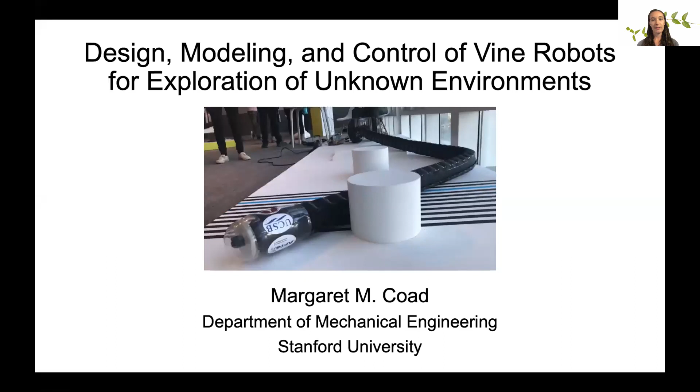Thank you so much, Allison, for that amazing introduction. It's so great to see all of you here, and I'll say more about that in the acknowledgements at the end. But I'm really excited to tell you today about my PhD research on a new type of robot that moves through its environment by growing like a plant. Here's a quick preview of the types of robots I'm going to be talking about today. The title of my thesis is Design, Modeling, and Control of Vine Robots for Exploration of Unknown Environments.

In the talk today, I'm going to start by giving an introduction about what vine robots are and what they're good at. Then I'll talk about how I brought a vine robot system out into the field to explore an archaeological site. Then I'll talk about three areas of research that I discovered based on the field exploration and worked on after I got back. The first was retraction of these robots, that is reversing their growth. The second was applying forces to the environment. And the third was using the entire body of the robot to sense the environment and the robot's own shape. Then I'll conclude with a summary of the contributions of this work.

I'll start with the introduction, and I'll mention that some of this information and a lot more about the state of the art of vine robots is published in a paper in the Frontiers in Robotics and AI journal from last year called Design, Modeling, Control, and Application of Everting Vine Robots.

There are many spaces that are too small or dangerous for humans to enter where we would like to see and manipulate the environment. Inspecting a water pipeline, searching a collapsed building, conducting minimally invasive surgery, or doing underwater archaeology are just some examples of these types of spaces where a robot could really help us get in and do tasks. However, there are a lot of challenges with existing robot design that make them unsuitable for these types of tasks. As one example, they need to be able to fit through small spaces while also being able to navigate over and around obstacles. That combination is challenging.

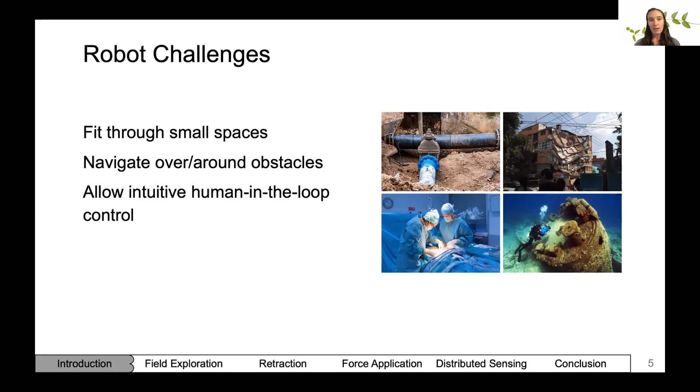Now, many of today's robots, such as the ones found on a factory floor, are rigid and very strong and able to do repeatable movements, but they're not able to do these types of tasks very well. So if you look to nature, you'll see that a lot of systems, like the bodies of squirrels, bees, octopuses, and vines, are not made of entirely rigid components. In fact, they might be made of a combination of rigid and soft components, or they might even be entirely soft.

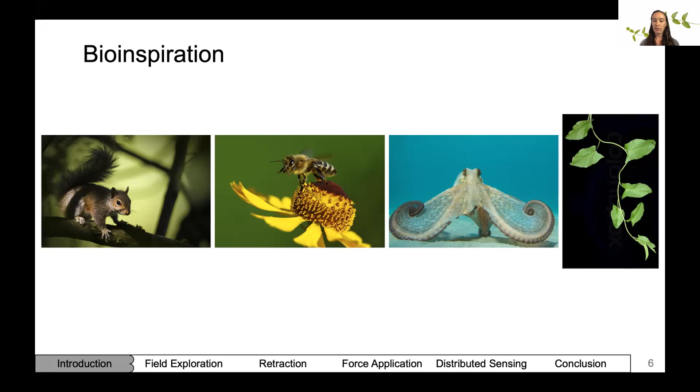For the rest of this presentation, I'm going to be telling you about how this new robot design paradigm of plant-like tip growth transforms robot capabilities for exploration of unknown environments.

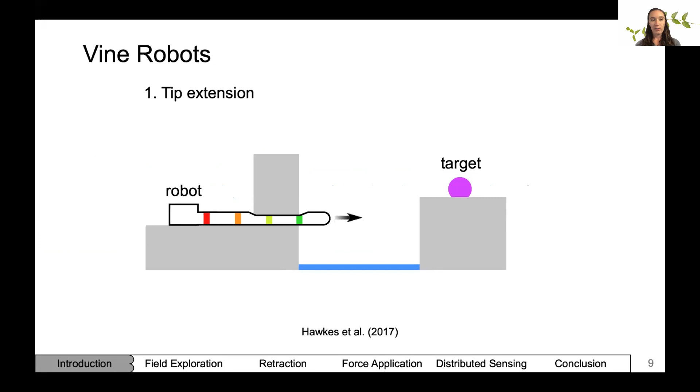The idea behind vine robots is that we want to have a robot that grows like a vine from a fixed base to a target. Vine robots have three main attributes. The first is tip extension. The second is directional control, so we can steer them as they're growing. And the third is significant length change.

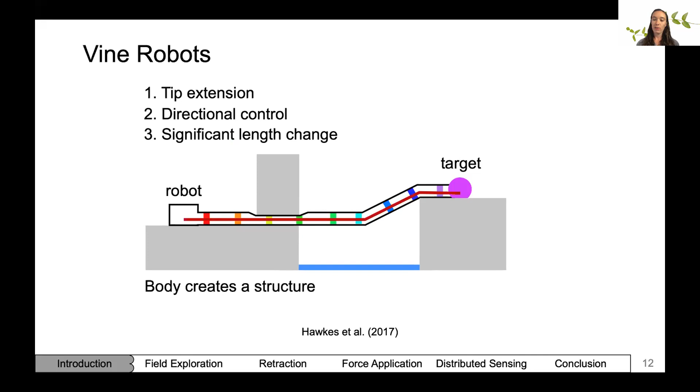Now, movement in this way has two main benefits over other types of movement. The first is that these robots can navigate confined spaces with ease because they don't need to slide relative to their environment to propel their tip forward. Second, their body creates a structure from base to tip, which can be used to transmit payloads or to transmit forces from the tip back to their base.

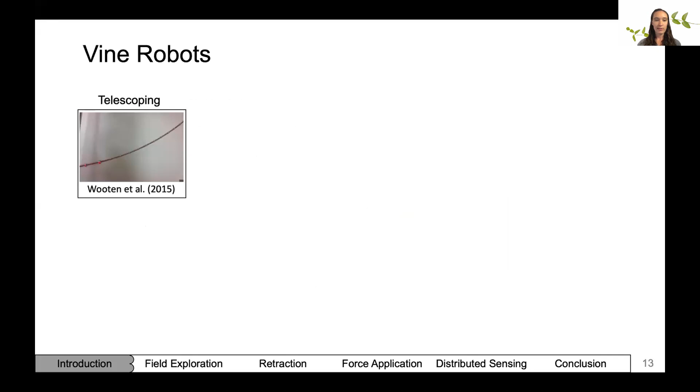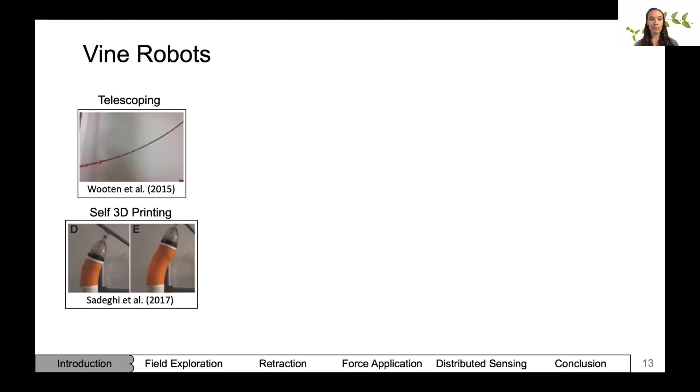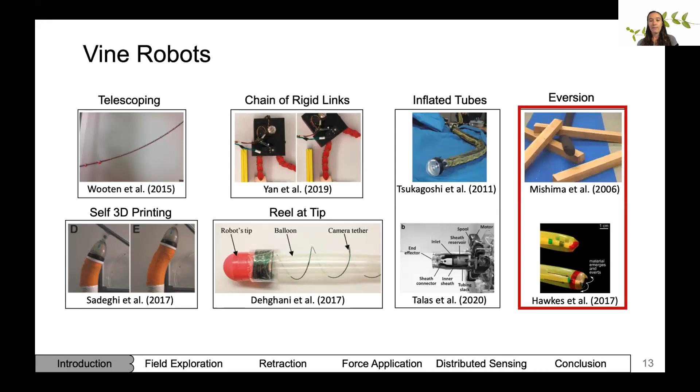Everting vine robots are made of a tube of flexible, non-stretchable material. Imagine a plastic bag that's folded inside of itself. When internal air pressure is applied, it grows out from the tip.

This is similar to trying to put on a sweater, but the sleeve is stuck inside. As you put your arm through the sweater, you push out the sleeve and it grows along with your arm, growing as your arm pushes it through.

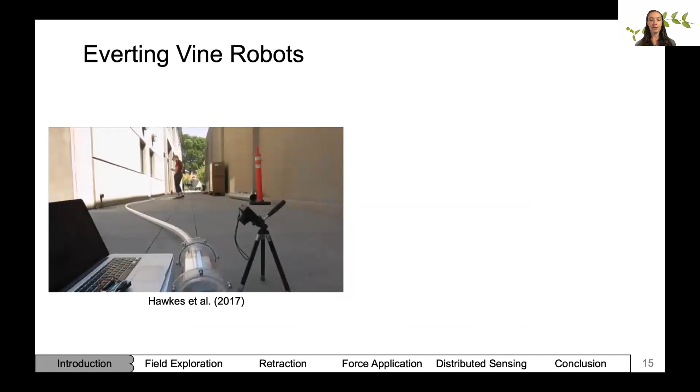These types of robots can grow to enormously long lengths by storing their material on a spool in the base. Here's a video showing growth to 72 meters long. The only reason it stopped growing was because it ran out of material.

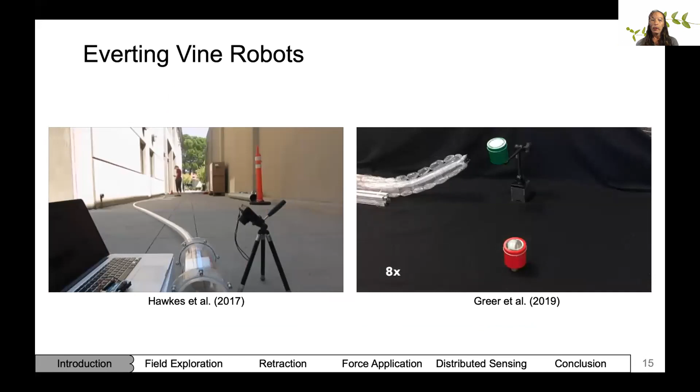They can also be steered by shortening or lengthening one side or the other of the robot body.

In addition, these robots have several benefits for exploration of confined spaces. First, they can navigate by using contact with the environment to allow them to steer as they run into obstacles. In addition, they can grow through apertures smaller than their body diameter, and they can use their continuum nature to support their own body weight and rise up over obstacles.

Based on these proof of concept designs developed in the lab, we wanted to take vine robots out into the field and see what they could do in the real world. This work is published in IEEE Robotics and Automation Magazine from last year as 'Vine Robots: Design, Teleoperation, and Deployment for Navigation and Exploration'.

Our research question was: how should we design and control a vine robot for exploration in the field? We had this amazing opportunity to take our vine robot out into the field to explore archaeological tunnels in an underground temple in Peru.

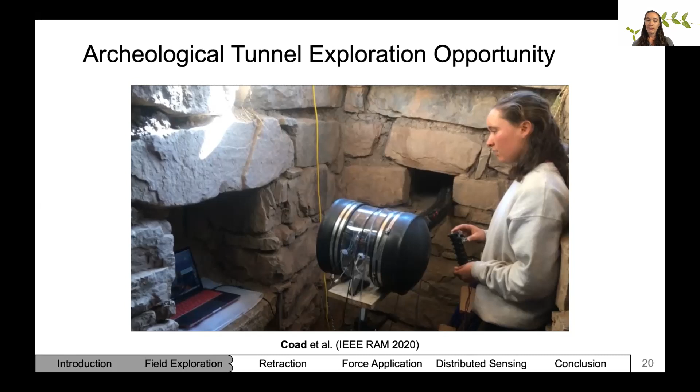There were small spaces too small for a person to enter, and the archaeologists wanted to be able to take video and see what was inside there.

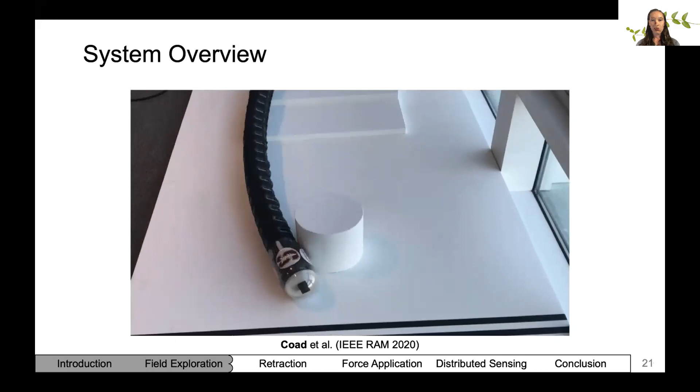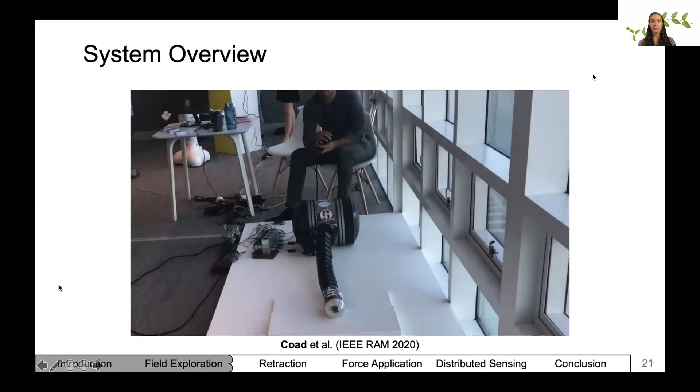Here's an overview of the system that we developed. It's a steerable vine robot with a camera at the tip that's able to grow to 10 meters long, and it's also able to be operated by a human operator using a flexible joystick.

This is an overview of the system. It has three main portions. First, the growing portion, which contains the camera mount and the soft robot body. Then the base station, which contains all of the pneumatic and electrical components required to control the soft robot body. And then the human interface, which allows the human operator to provide control commands to and receive visual information from the robot.

One of the things we needed to be able to do to use this robot in the field was to steer it at lengths long enough for navigation. So we needed to develop a new actuator that could work at long lengths.

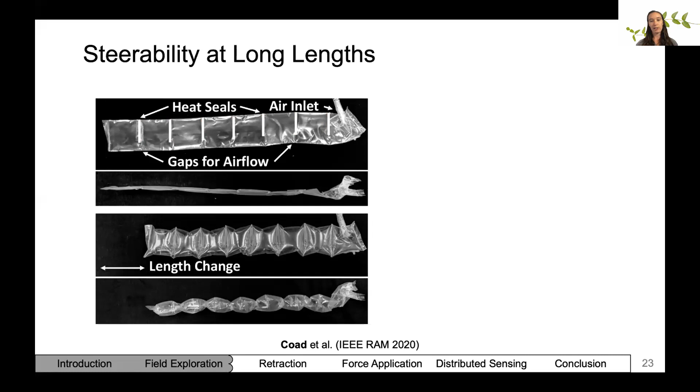This is the series pouch motor actuator, made by heat sealing a tube at regular intervals while leaving gaps for airflow, such that when the tube is inflated, each little pouch balloons up and shortens in length, causing the entire actuator to change length.

If you place 3 of these series pouch motors circumferentially around the robot body and along its entire length, you can have control over the robot tip position in 2 degrees of freedom, with the 3rd degree of freedom of tip position provided by growth.

Here's a video showing what that looks like. You can see that I'm commanding the robot to curve, and it's able to steer in any direction.

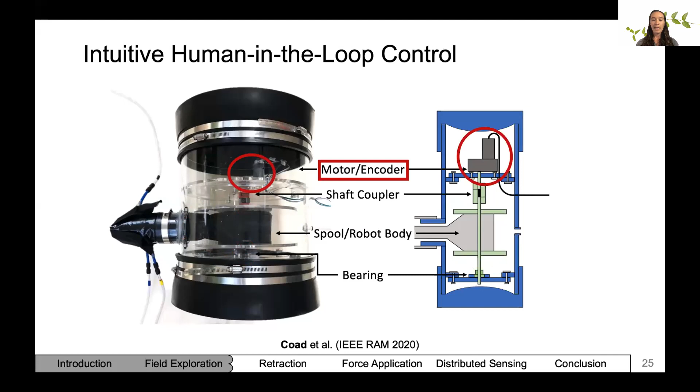Another thing we needed to do was enable intuitive human-in-the-loop control of both growth and steering. For growth, we developed a spool where the robot body is stored before it grows. On one end of the spool there's a bearing, and on the other end there's a shaft coupler that connects the spool to a motor and an encoder, which unreel to let out the robot body material as it gets pulled by the internal pressure.

Here's a video showing how that works. By using this spool and the motor in combination with pressure, we can control pressure and robot length independently.

In addition, we wanted to develop intuitive control over the steering. So we took the information measured by the joystick, which measures its own orientation using an inertial measurement unit at the tip. That inertial measurement unit provides a quaternion, which we convert to a curvature and bending plane angle of the joystick using constant curvature assumptions.

Then we calculate the joystick tip coordinates in its own reference frame, which we then map to the robot's own tip coordinates. And then we use a geometric model of the placement of the actuators, the series pouch motors, around the robot body to calculate what pressures we should send to each of the actuators to produce the desired robot curvature.

Another thing we needed to do was to enable operator situational awareness so that the human operator would know where the robot was without having direct line of sight of the robot tip. So we placed a camera at the robot tip, which gets pushed along by a rigid cap as the robot grows. This is similar to how a surfer gets pushed along by a wave, even though the wave is moving underneath the surfer.

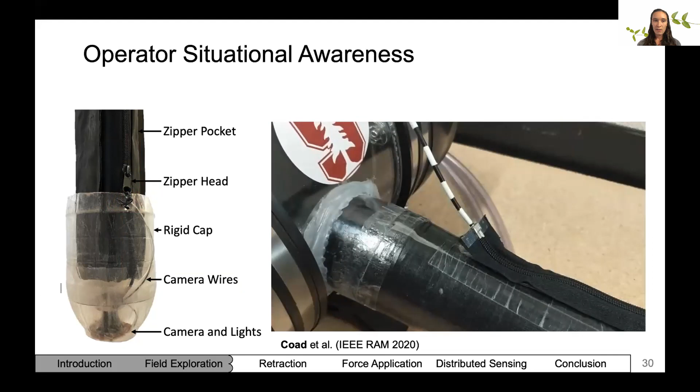So now that we had this system, we were able to take it outside and see how it did in the field. We explored 3 locations at this archaeological site that were chosen based on their expected relatively short length and difficulty to view through other means.

The first location was a tunnel that curved slightly to the right and had a rock blockage that the robot was successfully able to navigate and take video throughout much of the tunnel.

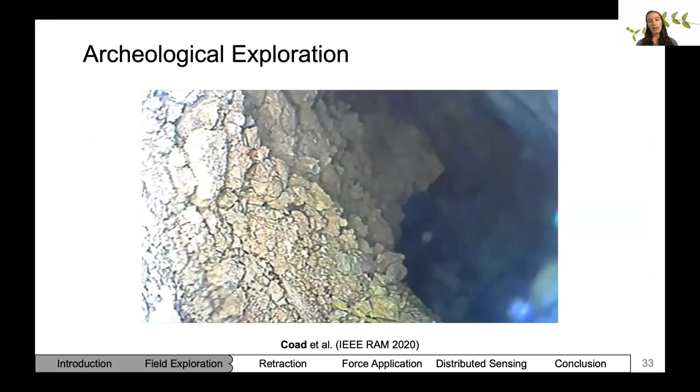The next tunnel had a 90-degree right turn, which would have been difficult to navigate with just a camera on a stick. The vine robot successfully navigated the turn and took video throughout the tunnel.

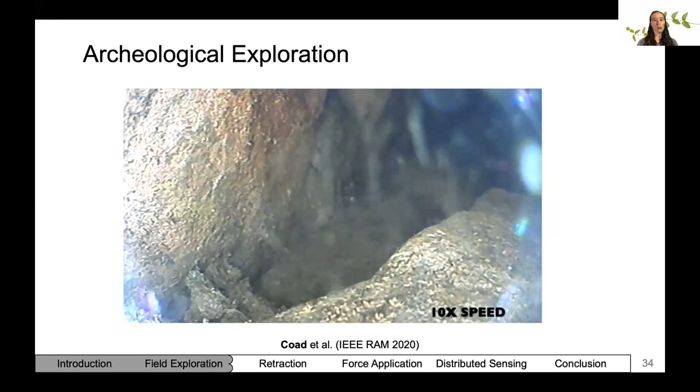Finally, the vine robot navigated a vertical shaft, which would have been really difficult for a remote controlled car, for example, and it successfully made it to the end of the tunnel.

In summary, our design and control method was successful for exploration in the field, and this was really exciting because it showed that we could use these vine robots for exploration tasks in the real world. The key takeaway here was that intuitive human-in-the-loop control was made easier by exploiting the desirable behaviors of the robot body. This field exploration was also really great for identifying areas for important continued work that would make these robots even more useful in the field.

So one area was retraction without buckling - getting these robots to be able to ungrow without losing control over their motion and force.

Another one was allowing excavation or environment sampling. So if you wanted to not just look at the environment, but apply forces to move obstacles in the environment or take samples of it, that was something the archaeologists were really interested in.

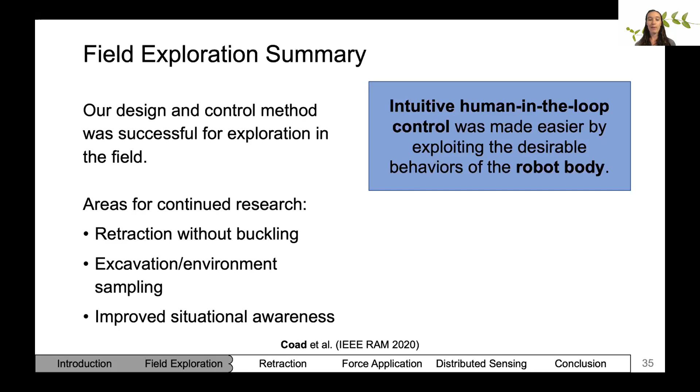And third, we wanted to enable improved situational awareness for the human operator, because just viewing the camera tip image was actually not super intuitive for understanding where the robot had gone. Developing some other way to create a map of the robot shape and where it had traveled would be really helpful.

So I'm first going to talk about solving that first challenge, retraction. This work was published in the IEEE Robotics and Automation Letters journal last year, titled Retraction of Soft Growing Robots Without Buckling. Our research question here was, why does undesired buckling occur during vine robot retraction, and how can we prevent it?

What I mean by undesired buckling is that when you pull on the inner material from the robot base, instead of inverting back on itself, the robot body tends to buckle into this uncontrollable shape. This can be disastrous if you're trying to have precise control over the motion of the robot and its force applied to the environment.

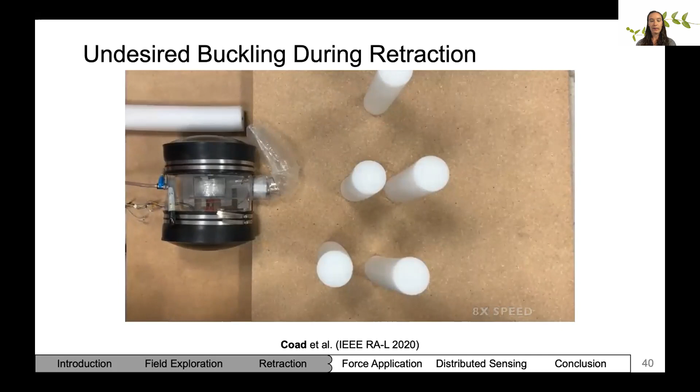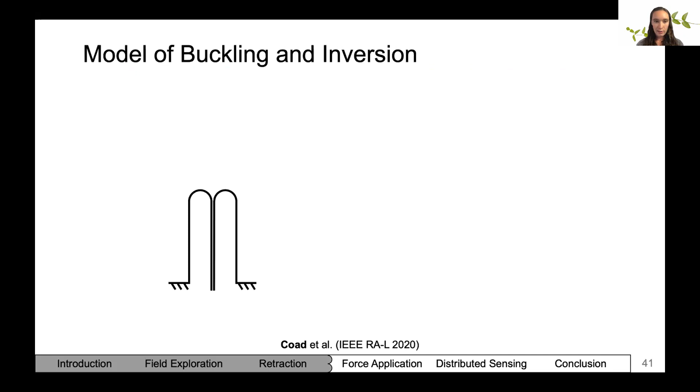So we started by developing a model to understand what's going on here and why buckling sometimes occurs and why inversion sometimes occurs. First, a little bit of terminology. Here's a side view of the vine robot. The tip is the distal end, and we call the wall the part of the robot body that doesn't move away from or toward the base. We call the inner part the tail, and that does move away from or toward the base as the robot grows. In order to get the robot body to invert, you need to apply a certain amount of tail tension, TT, on the tail.

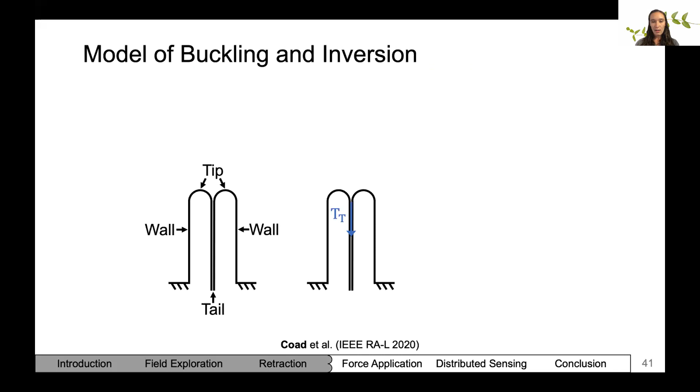Our model assumes that either inversion or buckling will occur depending on which one requires the lower tail tension.

Something else we noticed was that straight robots tend to buckle in the middle, similar to axial buckling of inflated beams, whereas curved robots tend to buckle at their base, similar to transverse buckling of inflated beams. Since buckling occurs differently in straight and curved robots, we model them differently, and there are existing equations for modeling these types of robots that we were able to make use of.

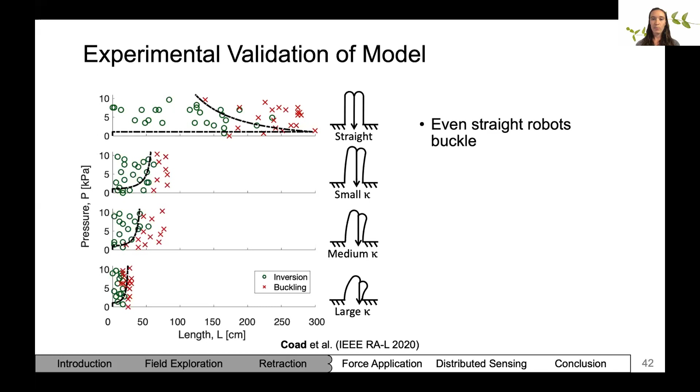A few takeaways from this model: even straight robots buckle, so you can't just make sure that the robot is straight and expect it to never buckle. Also, even high pressure robots buckle, so ramping up the internal pressure is not a solution to this buckling problem.

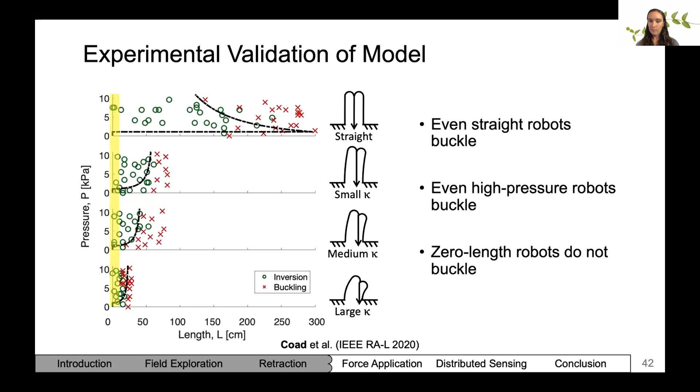Finally, the key insight here was that zero length robots do not buckle. So if we could somehow make sure that the robot length is always very short, then we would be able to prevent this buckling issue.

So this is the inspiration for our retraction device that we developed. The idea was that we wanted to make the effective robot length zero for the purpose of retraction.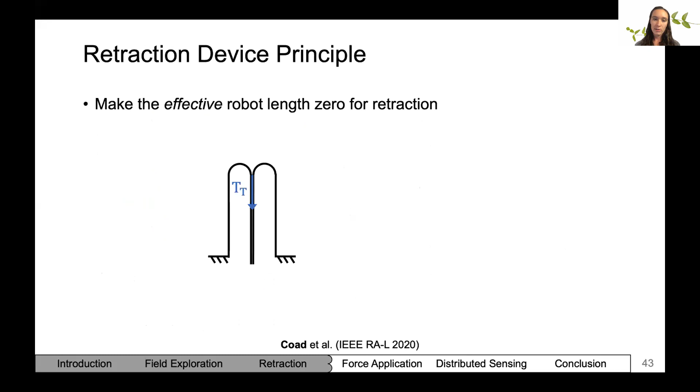What we were doing before was applying this tail tension to cause inversion, but we were applying it using a device, a motor at the base, which applies a device force FD and an equal and opposite grounding force FG on its environment. However, this means that the entire robot length is susceptible to buckling due to this force.

Our insight here was that we wanted to apply the force on the tail while being grounded to the robot tip. So we moved our device to the robot tip, where it applies its device force FD and its equal and opposite grounding force FG, but this time at the robot tip. This makes the effective length for the purpose of retraction zero.

Here's how we implemented this device. We had a pair of motors surrounded by a pair of hollow rollers that grip the tail. We also had a pair of routing apertures, one towards the tip and one towards the base, designed to be low friction, and also a tip grounding ring, also designed to be low friction.

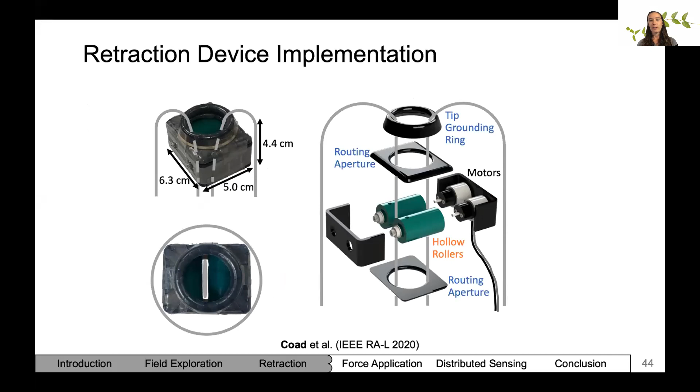Now that we have this new capability to retract without buckling, we wanted to show what we could do with it. One of the things you can do now, as shown in the bottom video, is actually explore a forking path. If you go down one fork, then you can retract, and then you can steer as you go down another fork.

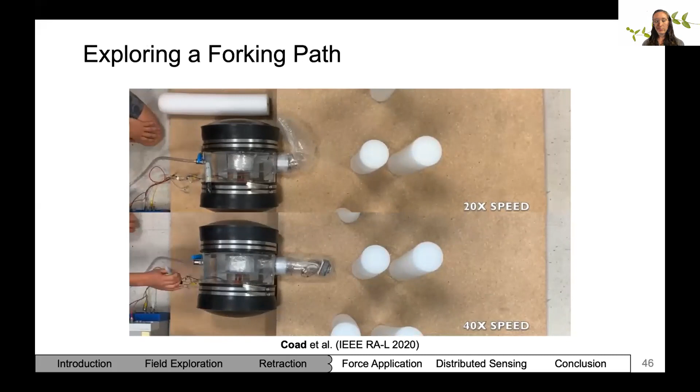Another thing you can do is navigate a delicate environment without applying undesired forces. In the top video, there's no retraction device, and the robot is actually successfully able to retract through this without buckling, but it does end up applying a high force to the environment. In the bottom video, you see that with the retraction device, the force applied to the environment is much reduced.

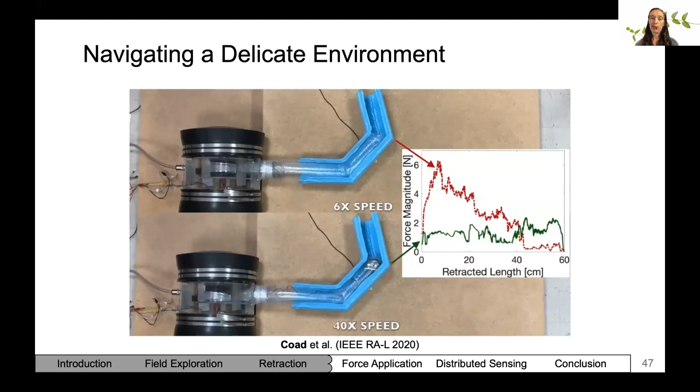Another thing we're able to do is collect samples of the environment by growing over the environment with tape stuck to the bottom of the robot body, then retracting back in. The tape sticks to the soil and environment, and the soil gets packaged inside the robot tail, allowing it to return to the base in reverse order of where it was found, leaving the environment undisturbed.

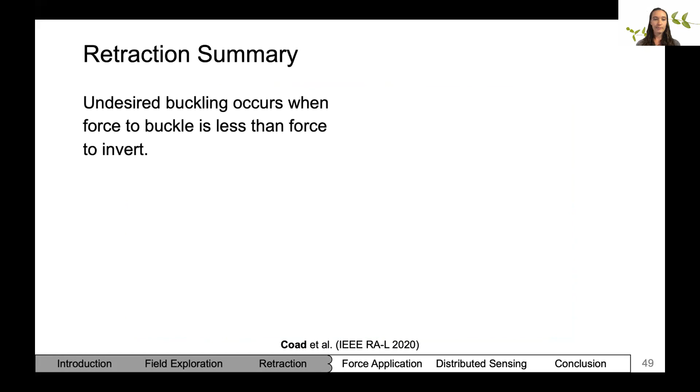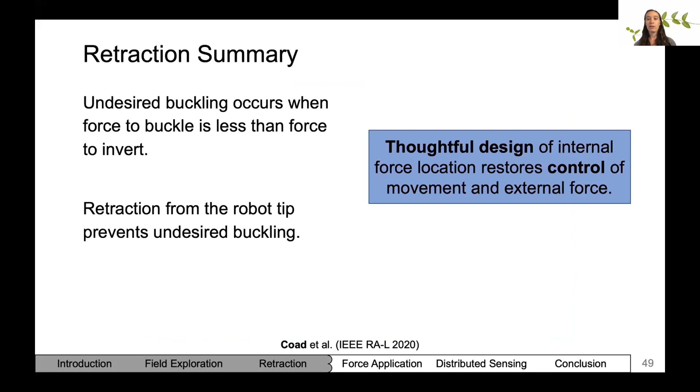In summary of this section, we learned that undesired buckling occurs when the force to buckle is less than the force to invert the robot, and that retraction from the robot tip prevents undesired buckling. A key insight was that with thoughtful design of the internal force location, we were able to restore control over the robot's movement and its external force application.

Now that we have this device at the tip, we wanted to take advantage of it to apply forces to the environment. This is work published in IEEE Robotics and Automation, at the IEEE RSJ International Conference on Intelligent Robots and Systems last year, under the title 'A Tip Mount for Transporting Sensors and Tools Using Soft Growing Robots.' Our research question was: how can we use a vine robot's high strength in tension to apply forces to the environment?

This is an interesting idea because something true of all engineering materials I know of is that their buckling strength in compression decreases with length, but their strength in tension remains constant with length. This is particularly important for vine robots because they can grow so long, and we want them to be able to apply high forces even when they're very long.

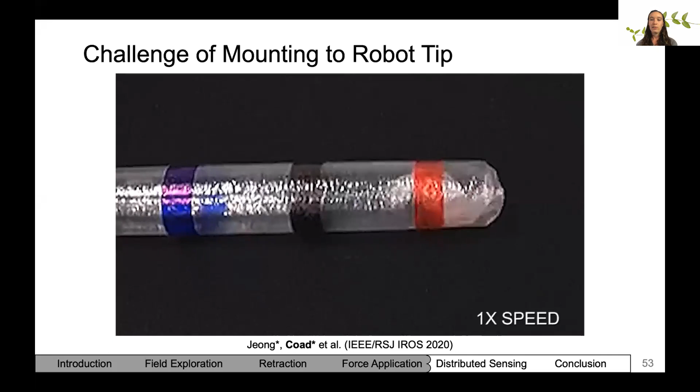So we wanted to mount something to the robot tip that allows us to apply forces there. But there are several challenges of mounting to the robot tip. One is that the material at the tip is constantly changing, so you can't just stick something there and expect it to stay there.

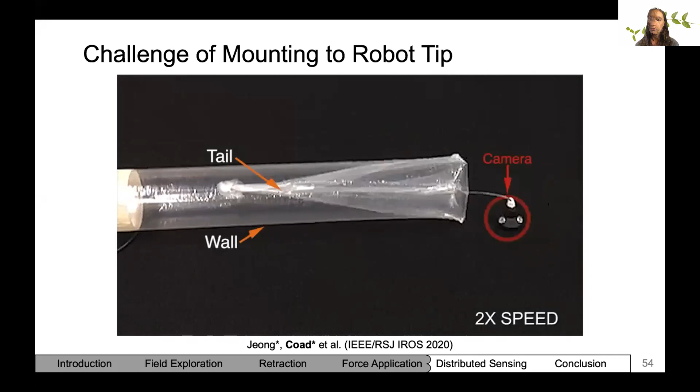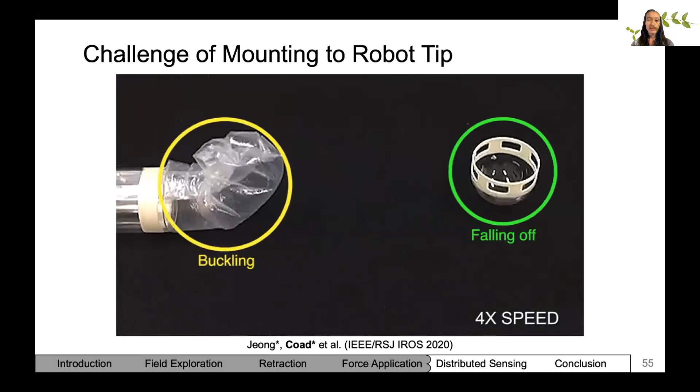Another challenge is that the tail of the robot moves at twice the speed of the robot tip. So if you were to place a camera with a string that goes inside the tail, the camera would get ejected as the robot grows and engulfed as it retracts. A third challenge is that with the rigid cap design I presented earlier, while it stays on the robot tip during growth, it actually falls off during retraction.

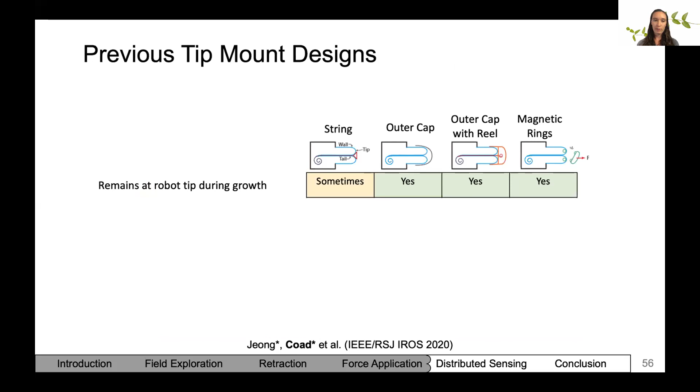There have been several previous tip mount designs developed for vine robots, and each has its own benefits and drawbacks. Some can remain at the robot tip during growth, some remain during retraction, some can transmit pulling forces to the environment, and some can function at arbitrary robot lengths. But none so far allow retraction without buckling. We wanted to create a tip mount design that has all five of these capabilities.

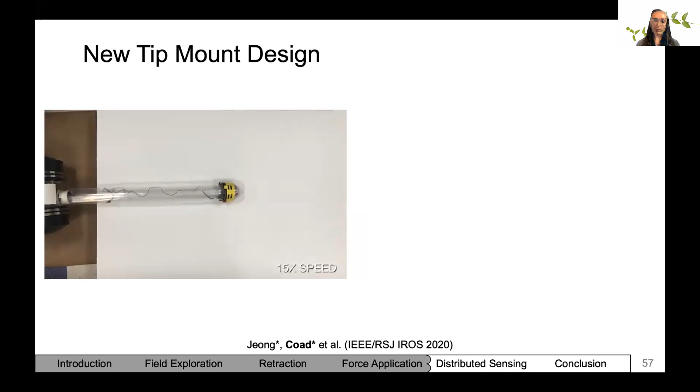Here's the design we developed. You can see that it does successfully remain at the robot tip during both growth and retraction without buckling, that it can remain at the tip during steering, and that it doesn't interfere with the operation of the series pouch motors.

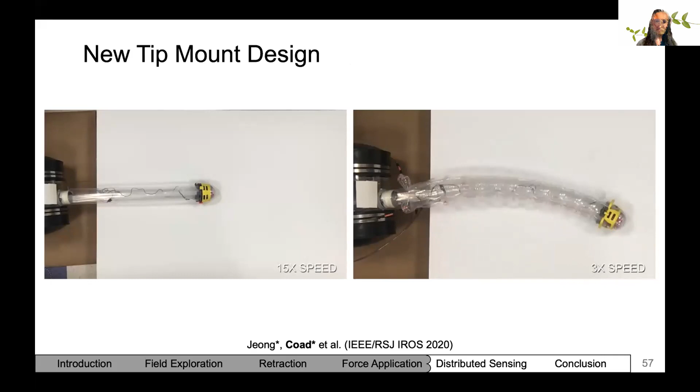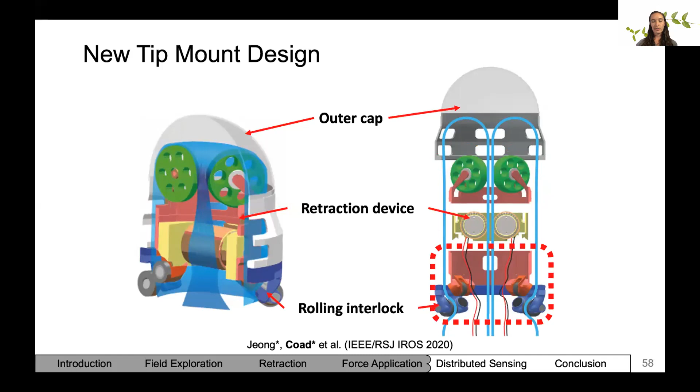Here's our design. It has three main components: first, the outer cap, then the retraction device, and then the rolling interlock, which interlocks the outer cap over the retraction device. The rolling interlock has bearings that allow the robot body material to pass through in a low friction manner, while making sure the outer cap will not fall off during retraction or during environment force application.

We were successfully able to show that we could pull on the environment using this tip mount design, and we wanted to understand what factors affected the weight limit we could pull with this device. The factor that actually ended up limiting the force we could lift was the rollers in the retraction device slipping on the tail.

Those limited the force capability to 2.5 kilograms. If we could improve that interface between the rollers and the tail, we could improve the weight limit. The next factor we'd come up against is the motor torque limit, which would limit the strength to 3.3 kilograms. If we could improve that through different actuation or stronger motors, the next limit would be the tip mount device itself falling apart, which happened at 7 kilograms.

If we could improve that by reinforcing the design, what's really exciting is that the material of the robot body itself could support up to 25 kilograms for this particular thickness. By making improvements to our design, we could actually apply an order of magnitude more force than we're currently able to, which ends up being quite a lot of force for a soft robot to apply.

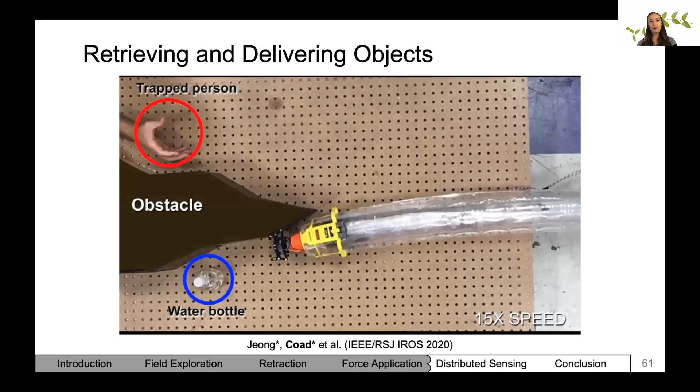And now that we have this tip mount design, we demonstrated that we can, for the first time, retrieve and deliver objects. Here the robot goes to the water bottle, retrieves it, and then delivers it to the trapped victim.

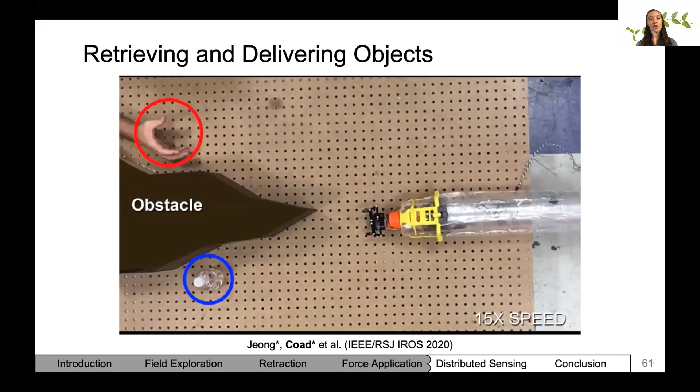In summary of this section, with thoughtful end effector design, we were able to transmit high tensile forces from the environment to the robot body while still allowing growth and retraction. A key insight here was that by harnessing different properties of the robot body in different directions, we were able to achieve both adaptability and strength. So the robot body maintained its flexibility and bending, but was strong in tension.

This gets at one of the grand challenges in robot design, which is combining adaptability and strength, because soft robots tend to be adaptable and rigid robots tend to be strong, but achieving the combination is challenging.

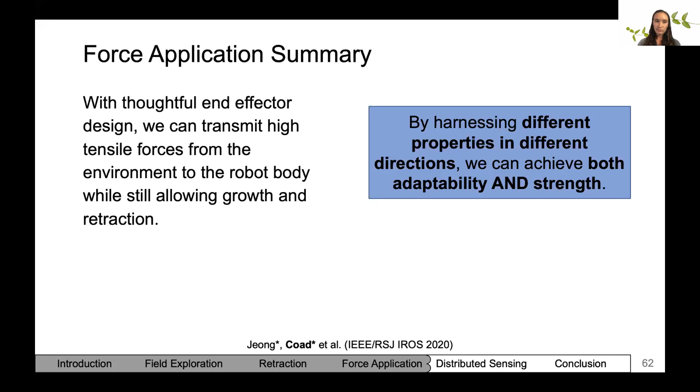So far we had looked at placing sensors at the robot tip, like cameras, but next we wanted to look at how we could place sensors along the entire robot body and use that to map the robot shape. This work is presented at the IEEE International Conference on Soft Robotics this year, under the title Distributed Sensor Networks Deployed Using Soft Growing Robots. Our research question here was, how can we sense the environment and the robot's own shape?

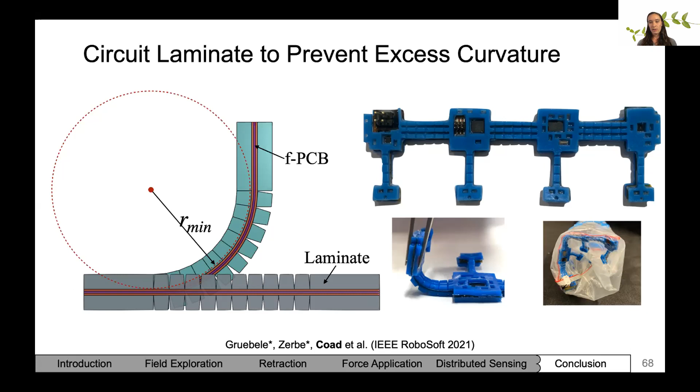We developed this blue laminate made out of urethane, which has a jamming teeth pattern, such that when the flexible circuit bends to too tight of a radius of curvature, the teeth jam, preventing it from bending any farther, but it also still allows the whole assembly to be flexible up until that point. You can see here that the laminate successfully protects the circuit while still allowing growth of the robot.

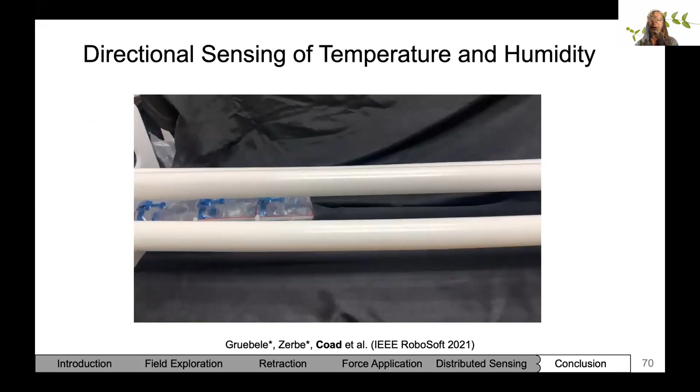Here's a demonstration of directional sensing of temperature and humidity using this sensor network. We're growing the robot in between a set of 2 pipes that are leaking steam, and then we're able to locate the leak.

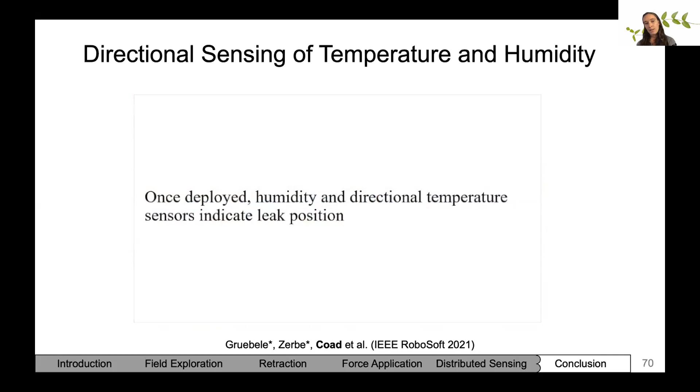In addition, we did shape sensing with vine robots using the inertial measurement unit orientations measured at each band, combined with our knowledge of their 3-inch spacing along the robot.

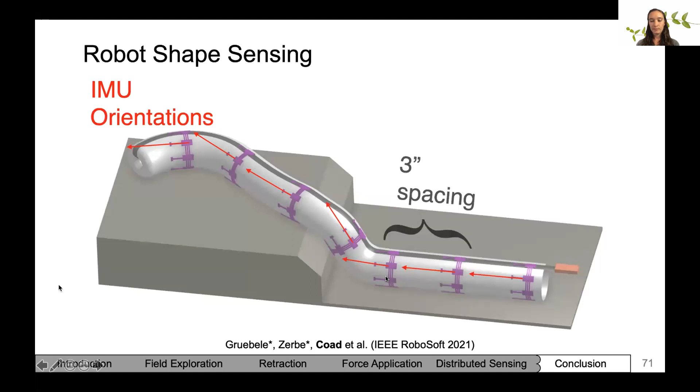To reconstruct the robot shape, we only know the orientation of the robot at these discrete points where the sensor bands are. Here's sensor band 1, and here's sensor band 2, and we don't actually know what's going on with the robot shape in between those 2 sensor bands.

If you look at the picture on the right, we notice that most of the time when the robot is inflated, it tends to bend at a discrete location, forming a bend that has a straight segment on both sides and then an approximately circular arc. So we assume that's how the robot bends in between these sensor locations.

However, we still don't know precisely where between the 2 sensors the bend is located. That introduces uncertainty into our shape prediction, which we quantified later.

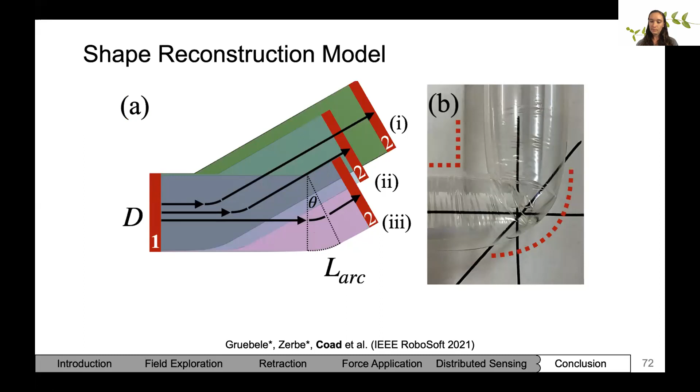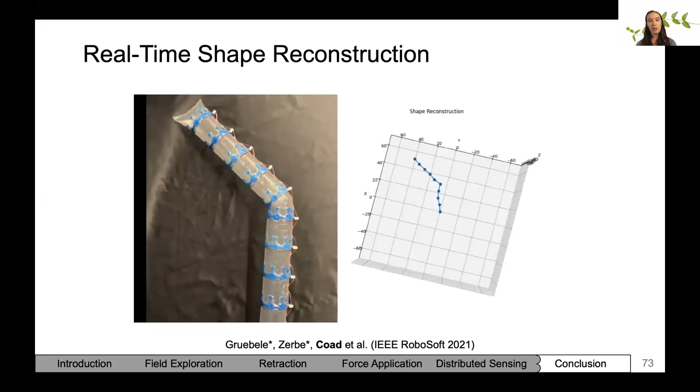We showed that this also works in 3D. We were able to grow the robot body through a pipe and map out the shape.

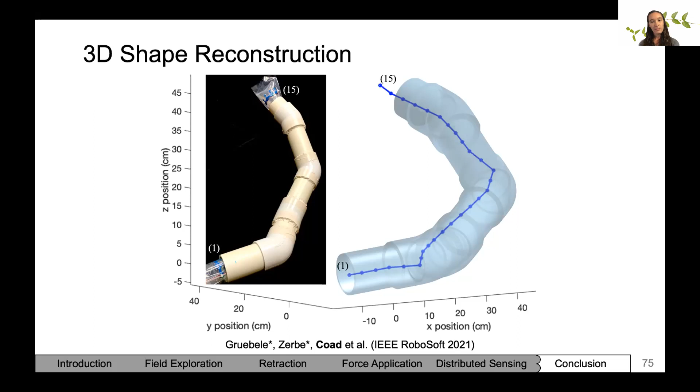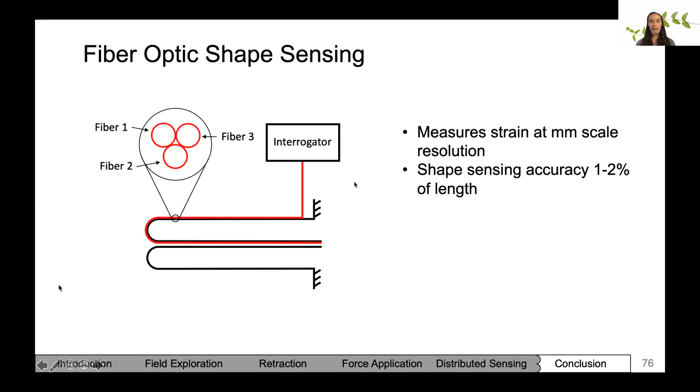We wanted to explore other shape sensing technologies as well that could potentially give us even more accuracy. So we explored fiber optic shape sensing, which has been shown in the literature to have shape sensing accuracy of 1 to 2% of the length. The way this works is that we have optical fibers that measure the strain along their length at millimeter scale resolution. They use an interrogator, which sends light through the fiber, and based on how it reflects back, the strain measurements can be done. Then we place 3 fibers in a triangle shape, and using that strain information, you can calculate the shape of this whole fiber bundle.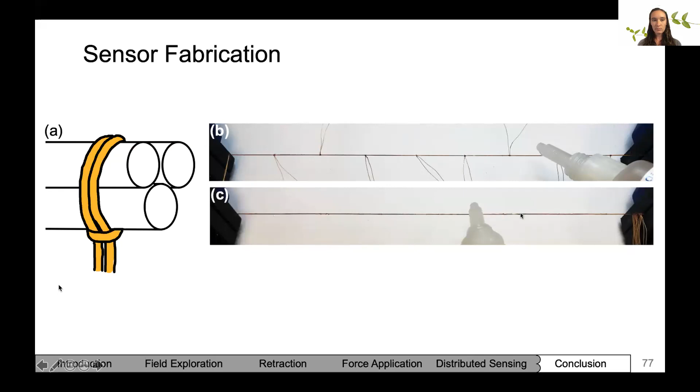So we fabricated a sensor using this method by constraining the fibers into a triangle shape using threads tied at regular intervals, then placing epoxy along the fiber bundle, and removing the threads and epoxying where the threads were. We also needed to develop a protective tubing similar to what we did for the flexible printed circuit boards, because these sensors will break if they're bent to too high curvature. So here we just used a tube that surrounds the sensor along its entire length and is taped along the outside of the robot body.

Here's a demonstration of the shape sensing capability using the fiber bundle before putting it on the robot body. There's a slight delay between the two videos, but you can see that the shape matches the real shape pretty well qualitatively. We didn't actually quantify the shape match yet, but that will be part of our future work.

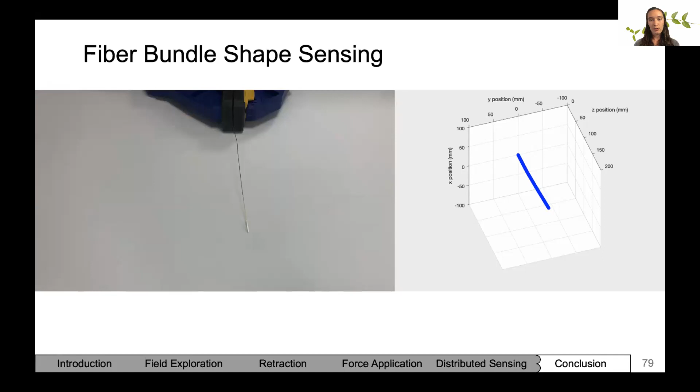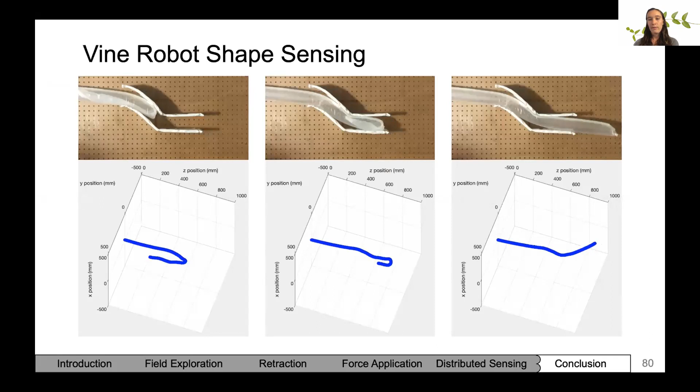We also placed this sensor on the Vine robot body and showed that with the sensor armor we developed, the sensor can successfully endure the growth of the robot and then the bending required to navigate a maze. The shape matches decently well, although there are errors here that we want to quantify and understand how to improve.

In summary of this section, by protecting sensors from excess curvatures, we were able to adapt flexible circuit technology and fiber optic sensing technology to place sensors on the robot body. With the first method, we were able to combine models of how the robot bends with sparse sensors to allow pretty high accuracy shape sensing. With the second technique, we should theoretically be able to get even more accuracy because we don't need to rely on models of how the robot bends. But that second system does come at a much higher price.

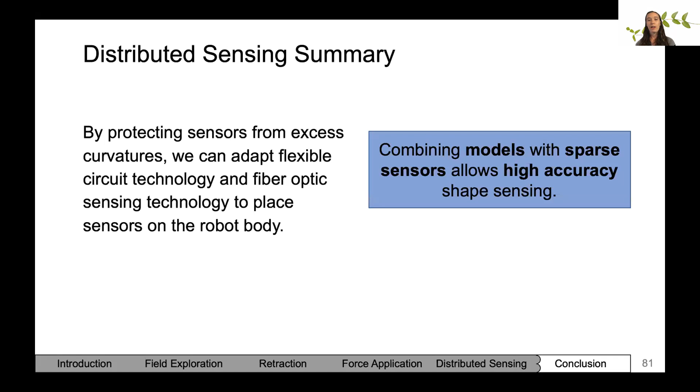Moving on to the conclusion, a summary of the contributions of this thesis is: first, we developed a successful Vine robot design and human-in-the-loop control strategy for field exploration. A key takeaway here was that our human-in-the-loop control method was able to exploit the desirable properties of the robot body to make it successful in the field.

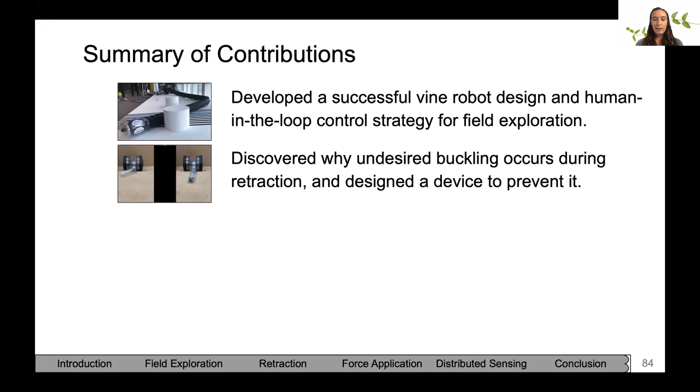Second, we discovered why undesired buckling occurs during retraction, and we designed a device to prevent it. The insight here was that careful location of internal force application restored our control over the robot's movement and external force application. Then we used the high strength of Vine robots in tension to apply forces to the environment while still maintaining their flexibility. An insight here was that we were able to take advantage of different properties of the robot body in different directions to achieve this challenge of both adaptability and strength.

Finally, we adapted flexible circuits and optical fibers for distributed sensing of the environment and the robot's own shape. With the flexible circuits, we made use of models of how the robot body bends to allow us to use a relatively sparse sensor spacing and still get reasonable accuracy. So you'll notice this was: we first deployed the robot in the field, and then based on insights from our field deployment, we were able to focus on the most high impact areas of research when we came back into the lab.

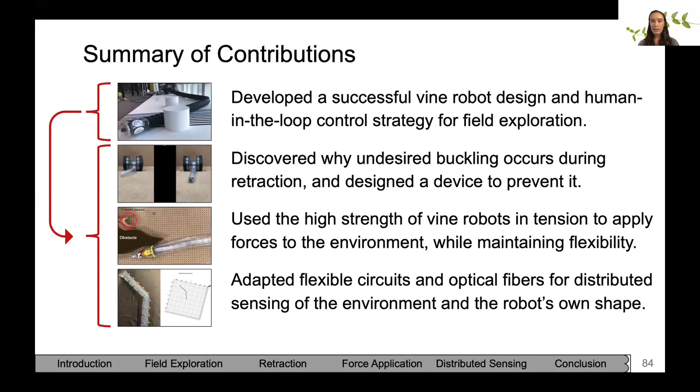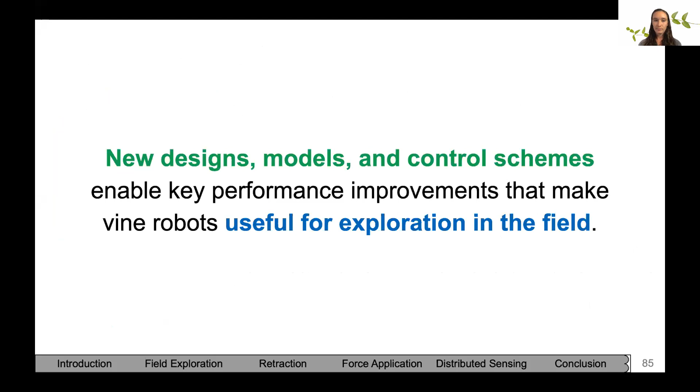So this thesis has been about how new designs, models, and control schemes enable key performance improvements that make Vine robots useful for exploration in the field. Thinking back to those spaces too small or dangerous for humans to enter that I mentioned earlier, I'm really excited about how much work has been done over the past several years that is really bringing us close to being able to do the types of tasks we'd like to do in these environments. I am excited about how continued research on Vine robots will make them even more useful for improving human health, safety, and productivity.

Oh no. Oh, wait, sorry, I needed to do the acknowledgements. Okay, one second. Let me find my other version.

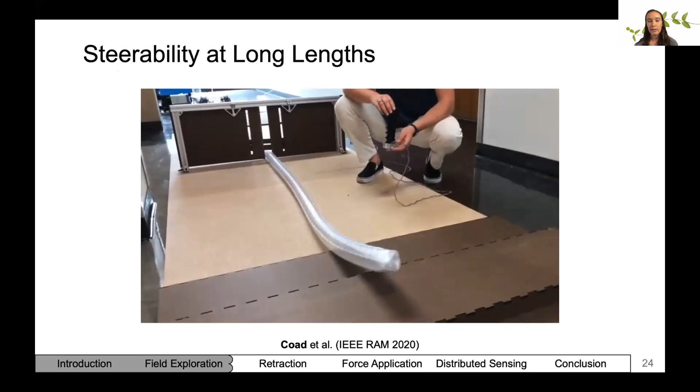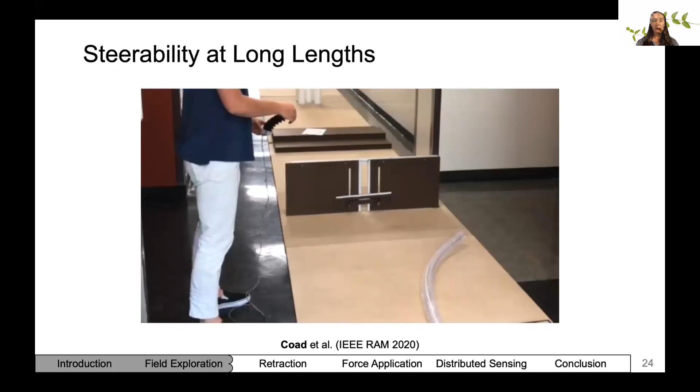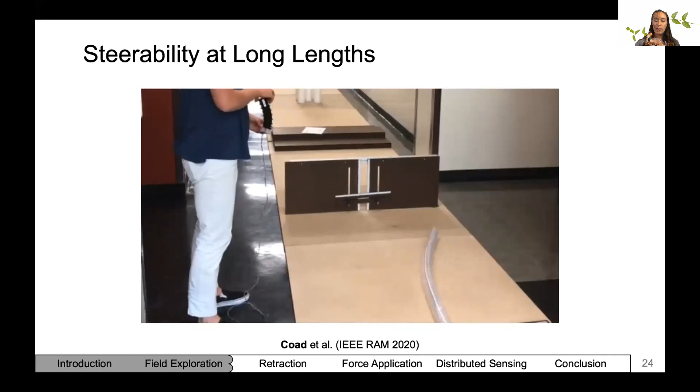Yeah, that's a great question. Let me go to that slide. So yeah, here's the video of it happening. And yes, so the series pouch motor actuators are attached along the entire length of the robot. And for each one, when you inflate it, it shortens along its entire length, and that causes the robot to curve in that direction. It's kind of similar to how your finger works, where you've got this backbone, and then you have the tendon on one side of your finger, where if you shorten that tendon, that causes your finger to bend in that direction.

Thanks. And Andrew Bylard has his hand up. Hi, Margaret. Really cool robot design. I was wondering what you think about the future of sort of letting this type of robot crawl free, like attaching the tip to some object and then actually pulling the retraction and extension mechanism forward. Since it can already pull a lot of force, what do you think about the possibility of that, and maybe miniaturizing the mechanism so that it can also squeeze through tight spaces?

Yeah, so just to make sure I understand what you're asking, are you saying that, like, what if you could anchor the tip mount to something and then move the base by pulling on it? Right, exactly. Yeah, that's an interesting question.

I haven't thought too much about it. But yeah, I guess you could have some kind of inchworming type motions, and maybe you could eliminate some of the difficulties with having the robot grow really long, where you can't apply very strong forces in compression. Maybe you could pull along the base and then keep the robot relatively short to brace against the environment and climb something. But I feel like with the Vine robot, the big advantage of it is that the body doesn't move relative to its environment as the tip grows. So you might be losing some of that.

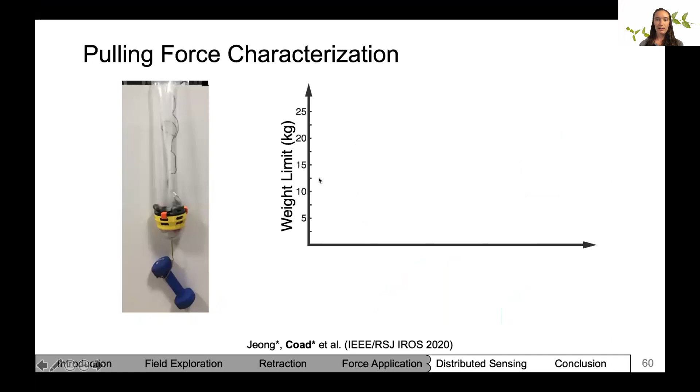Hey Margaret, great presentation, good to see it all brought together. I had a thought while you were presenting on pulling with the tip mount device. Could you comment on how internal pressure affects the maximum force you're able to pull with, considering the material limits and other limits of the device? You're asking about the slide where we considered all these limits, and how internal pressure affects that?

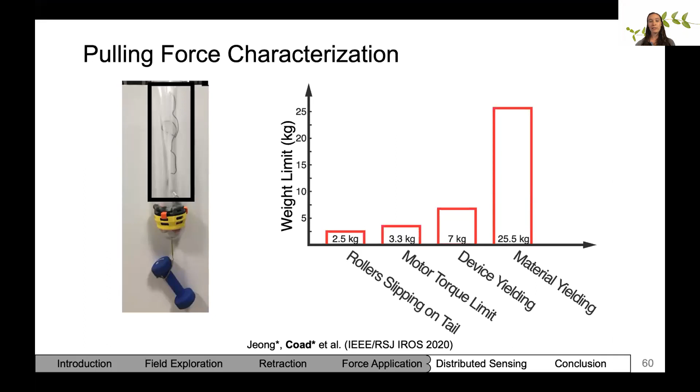That's a good question, because when retracting and pulling while retracting, you need to counteract the internal pressure times the cross-sectional area of the robot tip. So if you decreased the internal pressure, you'd probably be able to apply a higher force. But you wouldn't want to decrease it too much, since you need some tension in the outside of the robot body for that to work. And if you increased the pressure instead, you'd have to counteract that, lowering your weight limit.

Great, thanks Margaret. So to wrap this up, I'll give you the last two questions from the chat at once. One person, Antiku, asked: is it possible to scale everything up and down, like making a smaller robot that does the same thing on a smaller scale? And Nicholas Naclerio asked: what aspects of this research are you most excited to explore next? So scaling and what's next are the last questions.

Great questions. As far as scaling, most vine robots have been tested at a similar scale, ranging between 1 to 4 inches in diameter. I think it would be really interesting to explore making them the size of a room, or making them really tiny. But different things come into play in both situations. When you make them very small in diameter, it takes higher pressure to get them to evert, because you have a smaller cross-sectional area to push against. When you make them very large, they'll burst at a lower pressure. So there are challenges, but I think small variations around these sizes are definitely possible.